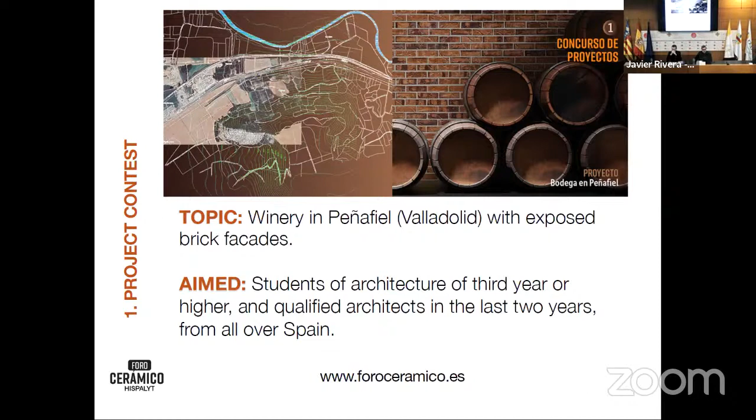The first one is the project contest that I was saying we are enrolled in. This year it's this winery in Peñafiel, in the interior of Spain. Although it's guided through a special course, in our case it's open for all the school. It's true that it's for third year or higher, but since it's team work, either you can look for teammates, and as you have one third or more on the team, you are able to participate too.

In any case, there are these two ways of working: through the local school, which is the one we are participating in, and then we compete against the other schools of architecture in Spain. So for the national award, there are these two phases of competition.

In our case, as I was saying, we are working in Architectural Project 5, so it's somehow mandatory for them with Sergio García Gascó. So if we don't win, it would be Sergio's fault for sure. But in any case, it's open for the rest of the school. We participate in this first phase, and then the winners and mentions will go to the second phase, the national one. So we need to win the national one for sure.

The inscription is free. That's something really important for us as a school. All the information is on the website, so you can check all the requirements there. You can also ask me for any data that you need. And the deadline in our case for the local one is the 25th of May.

As I was saying, in Architectural Project 5, they will develop the work during school time, so it's kind of part of the subject. And there is a small prize, but at least something, with two mentions, and then a bigger one if we are the real winners of the national one, which is the one I'm sure we are going to win this year for sure.

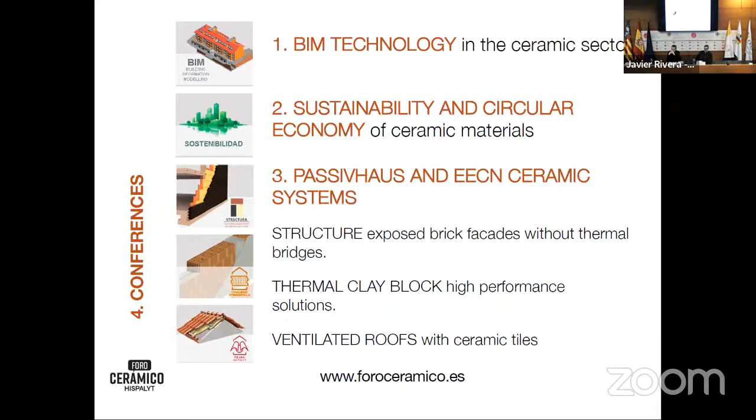And finally, going forward, there is also all this information about technical issues, which I think is really helpful, especially for working on your projects, where you can find a lot of information about this idea of working with brick in many ways, not just in a more traditional way. It's all this information that you can check and work with, especially for the competition — we are going to work with some of this material.

Also, if you ask for it in the survey, there is this factory visit, so we can actually go and visit how this material is built, which I think is also something interesting to see. And all this work is usually disseminated through the website, the ebook, so you can check other years' competitions if you are competing.

So all these things are recollected over there, which I also think could be interesting. As I was saying, it's very important: your architectural project teachers will provide you a survey so you can fill it in and think about which of those you are interested in, and we can continue promoting more activities for you.

Okay, so really quickly. As I was saying, we are really happy to have Carles here, which I think is a really young studio. It's one of the most outstanding architecture studios nowadays, winning a lot of competitions. I'm not going to mention all of them, lecturing all around the world, teaching.

He's also a teacher, but especially I would like to highlight his precise work in terms of understanding the site, which I think is really important for you to learn, because he has this careful analysis of where he's going to intervene.

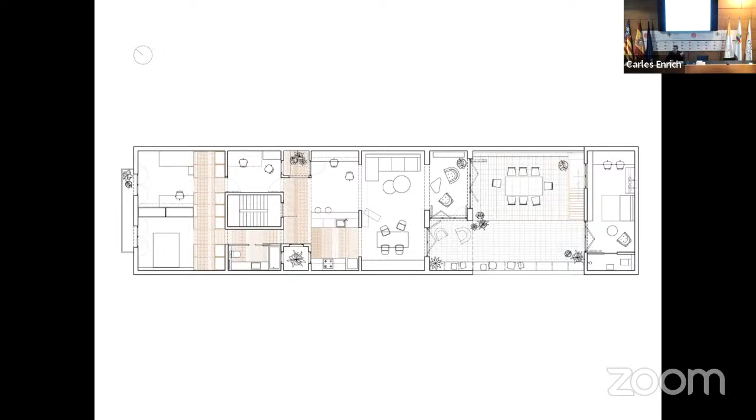So we started to do this kind of intervention, like opening spaces, of course with new structure in order to make this sequence of indeterminate spaces, which would make a connection between the interior and the exterior, the street, crossing the patio as a new space, and then introducing a new layer after transforming the pre-existing - a lightweight layer with wood or metal, understanding that this could be reversible in the future, and also trying to explain the difference between the pre-existing and the new elements, for storage or for using as a vegetal pergola.

And after all, this idea of trying to make a permeable sequence from all the spaces, understanding the street and the courtyard as part of the house. Understanding in the Mediterranean culture, also in Valencia, we can live in the outdoors like 8 or 9 months a year, even now. So I think we should be more worried about the summer heat, so we have to improve this kind of shadow and comfortable spaces in the exteriors.

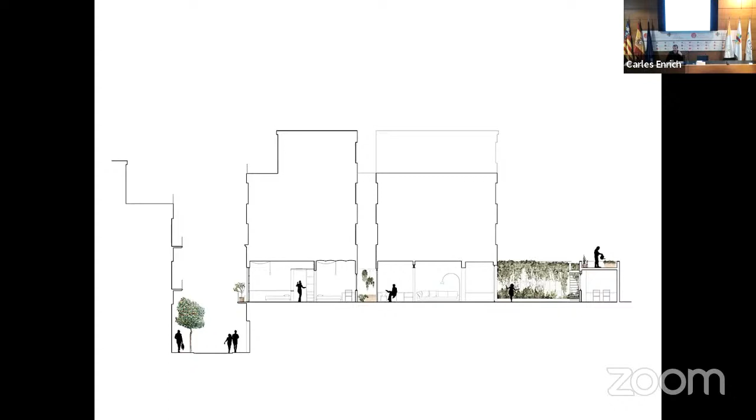In spring, autumn, and summer, we can open the house and live in the outdoors. It's a completely different idea from the passive house concept, which is a Northern Europe concept for an enclosed house. We think the house has to be passive in terms of installations, but the users have to be active in understanding how they want to live there.

With this approach, and with the commitment of the client to understand this kind of living, we understand the house could be only like a sequence of different spaces, connected and linked to the exterior, introducing vegetation as a new layer, as a biological material that can create shadows, and placing only the minimum things like the kitchen, in order to leave the space indeterminate so users can use and reuse it in the future as anything else. They can do whatever they want, and only these structures define the spaces without closing or enclosing the rooms.

So at the end, for us, the most important thing is this idea of transforming the exterior space, with these ropes and vegetable plants that give shadow in summer, but in winter let the light in, so it's a really comfortable place.

Another house, this one a single house between party walls in the north district of Barcelona, a very nice district close to Guinardó mountain.

We found this house, from the beginning of the 20th century, 1920, 1921, but it had been transformed and intervened by the former users, with all sorts of additions, and was really in a bad condition.

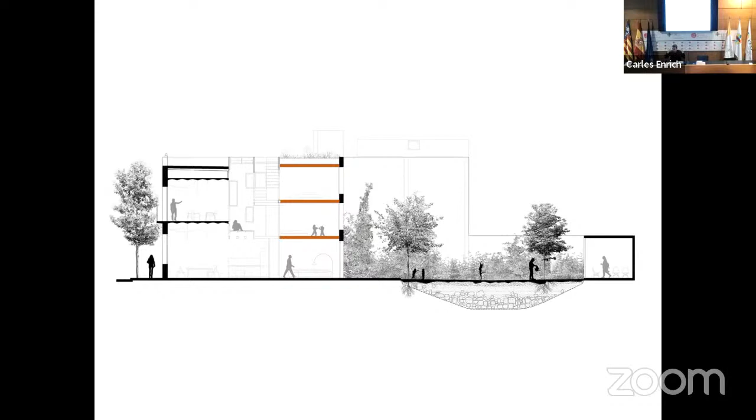At the middle of these two structures, the newer and the older, we placed all the facilities — the bathroom, the kitchen, and the staircase — in the middle of a patio with a skylight, so all the different rooms can have cross ventilation and a good relation with the exterior.

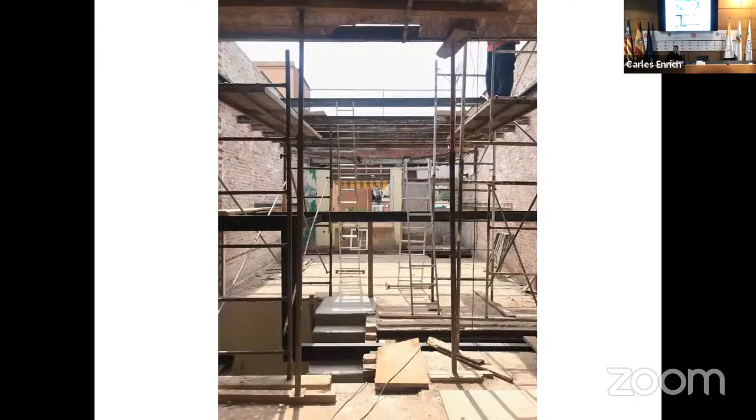This is some pictures of the work site progress. We made this metal structure to support the new slabs, the wooden slabs, left exposed like this as pavement and ceilings — a 20 centimeter CLT, already finished for this.

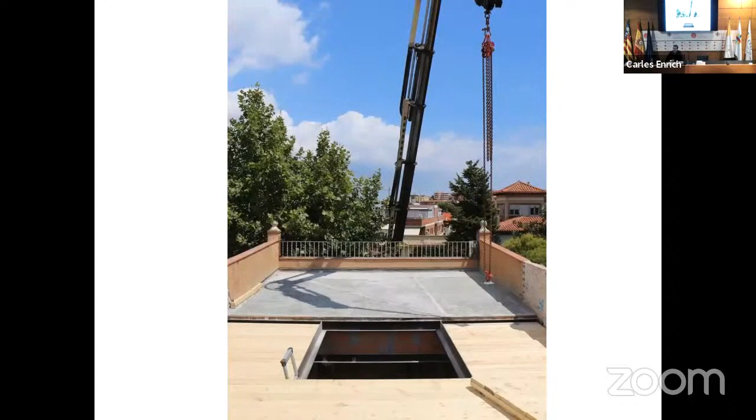This is an image of the central space that really helps improve the morphological conditions of the house, all the ventilation, cross ventilation, and natural lighting. This idea of understanding the sequence of time, the old, the new, and in the middle a void space that connects everything.

So the house at the end has two phases, the former phase and the new house, which has three levels, with this idea again of a permeable connection between the ground floor and the garden, understanding that the house itself is like a garden, an exterior space. Time is an important factor because it improves all these external conditions.

This layer of vegetation creates natural shadows, and in the center of the house we have this vertical connection between the different floors, and a greenhouse in the middle, which can be opened in summer to extend the surface and the connection and permeable conditions of the house.

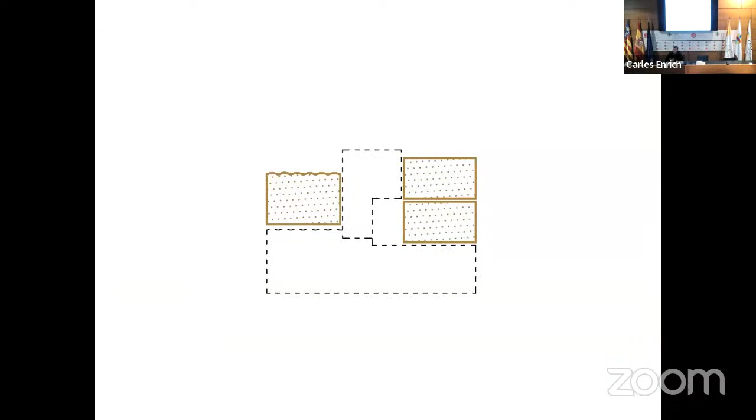In winter it can be closed, like a glass house, a winter garden. It can divide the house into different spaces, or it can open up into one single space. These are some images of this space.

Where it really works to improve the thermodynamical condition of the house. We are really concerned about this idea of moving air inside the buildings. At the end, we as architects build surfaces and work with materials, but the main factor of comfort is air temperature. So what we have to do is understand the values of materials.

Brick has inertia, wood doesn't have inertia. It allows a really fast temperature change, but it has good isolation conditions. And then this idea of having a vertical permeable patio improves the bioclimatic conditions of the house.

Also, introducing this idea of nature and greenery inside improves the quality of air and the quality of the space. So as I mentioned, this patio with the skylight captures the heat in summer and winter, and it's not just like a heat container, but in summer it works like a chimney, in order to achieve good ventilation.

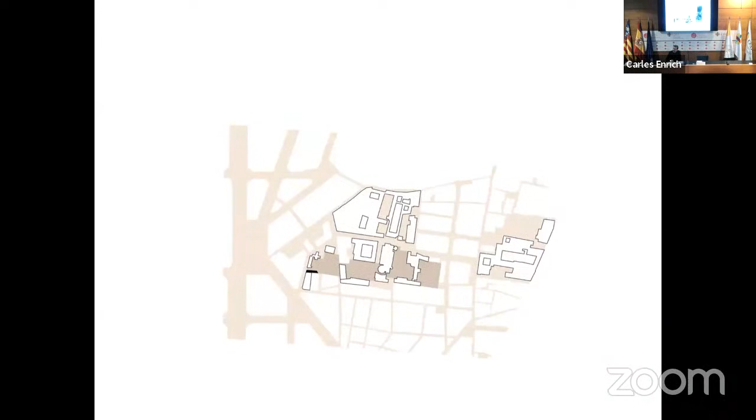We entered this competition to transform an existing housing building, which was unused, empty, and closed. The brief of the competition was to transform it into a public music school.

But the municipality of Barcelona wanted to demolish this building, because they have a problem with old buildings, since it's very expensive to transform them into something from the 21st century in terms of código técnico, regulations, etc. It's really expensive, and we also have problems with occupation.

These buildings in the center of Barcelona, in some areas, have a real problem with squatters. They get into the building and we don't have a law to remove them, and it's really a problem for municipalities. So they always try to demolish these buildings, which are often in bad condition.

But in this case, since it was in front of this old historical building by Josep Lluís Sert, the brief of the competition asked us to maintain only the main facade. We were really against this, since we didn't think that was a good idea in terms of reusing a building, only to maintain a facade and demolish the rest.

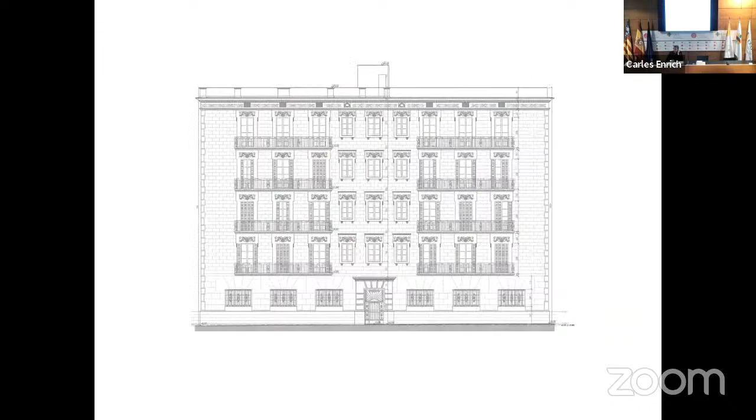We didn't really believe that, and instead of demolishing everything and maintaining just this facade as a framework, we proposed to maintain all three facades, in order to maintain the volume and the image of the street, and also to save parts of the structure to keep these three facades.

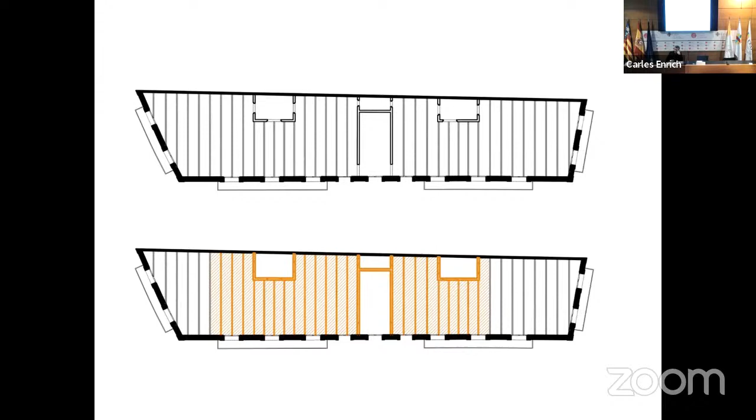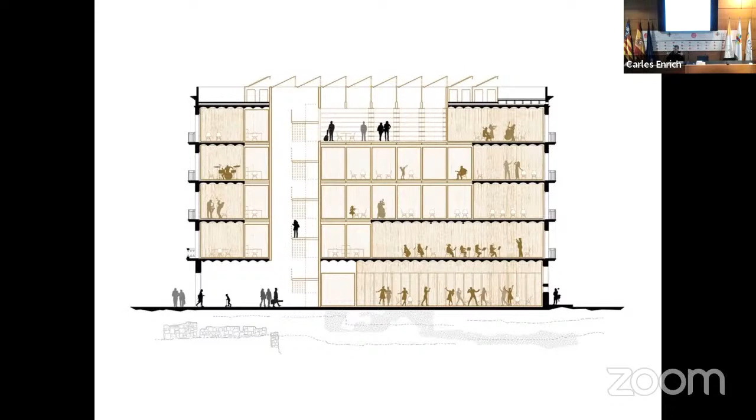And then we proposed this strategic demolition of the interior part of the building, in order to maintain the perimeter, the former structure, but introduce a great void space in the middle where we could add a light wooden structure that doesn't increase the weight of the building. This is a very good idea when working in historical centers like Barcelona's Raval, because we have a lot of archaeology and ruins underneath.

So with this idea of maintaining parts of the building and just intervening in the center, another idea that helped us win the competition was to replace all the rooms from the facade and put them on the back, between the party walls. This way we could have a corridor in the facade, like a street or public space inside the building, understood as a street connecting all the different music rooms.

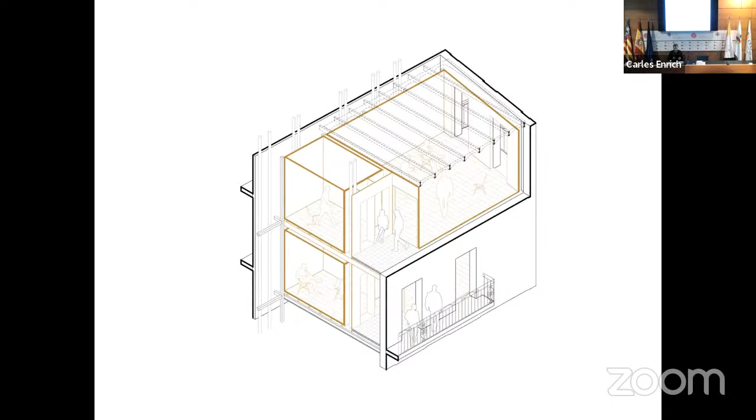And then this idea of box in a box, working with the great pre-existing box of ceramic, bricks and stones, the mineral box, and then introducing these light structures for the new uses that didn't touch the party walls, so we had some space for installations and facilities.

And then another idea was to understand the climate conditions of this place. Raval doesn't really have, the neighborhood has very narrow streets and has very low lighting, very low heating, not much sun heating, because the streets are really, really narrow. So in winter it's a problem. Now we wanted to achieve a good reduction of the heating.

And then we proposed this glass roof that in winter works like a thermodynamical idea of keeping the heat in this part of the roof, and in summer we shade all the glass roof, and it works like a thermodynamic conductor to help the heat go out of the building.

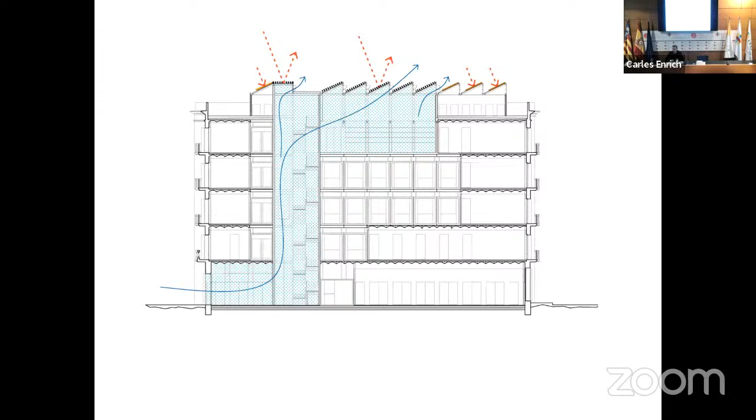So with this kind of interventions, with this kind of ideas, we try to reduce the need of installation in public buildings, and also try to improve the bioclimatical spaces inside the buildings, which we think is really important, in order to reduce the need of machines inside the buildings.

So now the building, we just started this first one, which is the intervention, the interior demolition of some parts of the building. But we are really happy because with this competition that we won, we could save, or we think we could save the original building. So that means the history of the building, that means the material, reducing the need of new resources, and of course obtaining these kinds of vertical spaces, which were very powerful.

Okay, with the same idea, we improved this idea in another competition. Actually, this was, I think, the first competition we won in Barcelona, 6 years ago or 5 years ago. But now we had the chance to finish the first one after 6 years. So as you imagine, we are a young studio, but now we are finishing the first competitions that we won 5 or 6 years ago. So in terms of architecture, you have to be patient, and you have to take your time.

This is Vallcarca. This is a neighborhood in the Gracia district, in the north of Gracia. This is a very interesting neighborhood. It's actually in the valley of Tres Turons, the three hills, as you know, Parc Güell and Turó de la Rovira, etc. So this was a former agriculture area. This was a former second house area, even for Barcelona, because this was not in the center of Barcelona. This was like in the outskirts. So there was plenty of these small houses with gardens implemented in this topography.

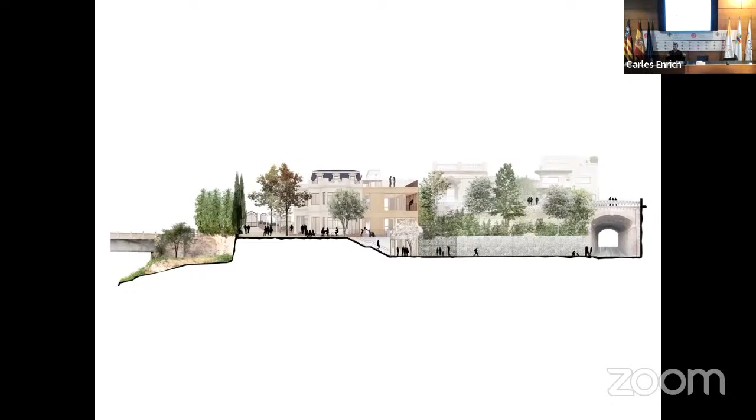So we could improve a connection that was far away from our competition site, but we took a risk on that, and then we proposed in the competition that all these gardens would be, in fact, a connector between the different streets. So it would help.

It will improve the accessibility of Vallcarca's inhabitants. So at the end, for us, the competition was not only about the refurbishment and renovation of the building, which was also an extension because it's a really small building, but about improving this idea of urban connectivity. We won the competition with this idea.

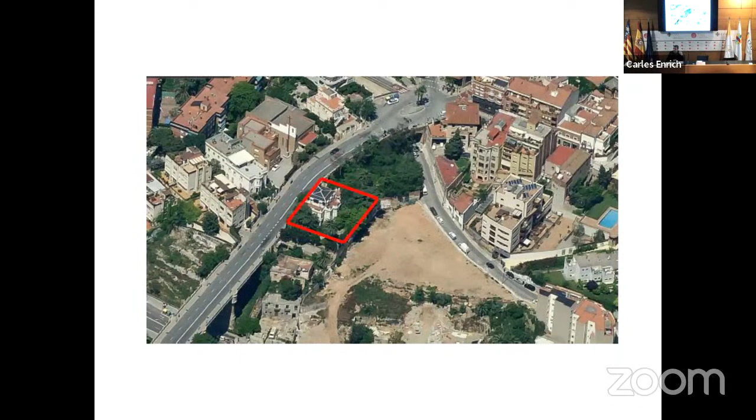We were quite risky because we were outside the scope of the competition, but I think the jury appreciated that we were the only ones who saw this opportunity, and they gave us the first prize. So we developed this project.

This project was about understanding, like the other projects, the value of the pre-existing house, with tough, mineral materials like bricks and stones. So we thought we could replace the permanent uses in the former house with a light wooden structure, in order to have this contrast between the new and the old.

This light structure was an indeterminate space, for different uses, multi-purpose uses, just a polyvalent surface area. Of course, we tried to be very precise in order to do this kind of overlaying system between the different structures.

We finished the project, and in March 2020, three years ago, we were about to start construction. We actually had the first meeting with the municipality to start the construction process. But in March 2020, I don't know if you remember, there was a world pandemic.

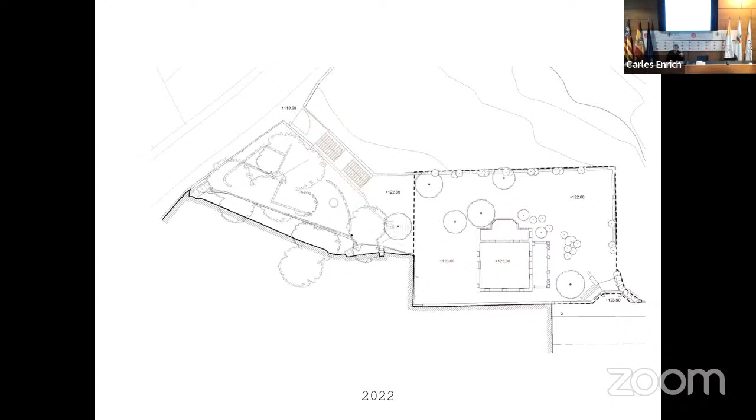And then, of course, we had the commission of intervening in the house, in order not to leave it as a void space with rooms in very bad condition. So we decided to demolish the interior, but leave it as an open space linked to the gardens.

So at the end, we're going to make this whole project into a garden, a public space, and the house itself would just be a roof, a shelter for this exterior space.

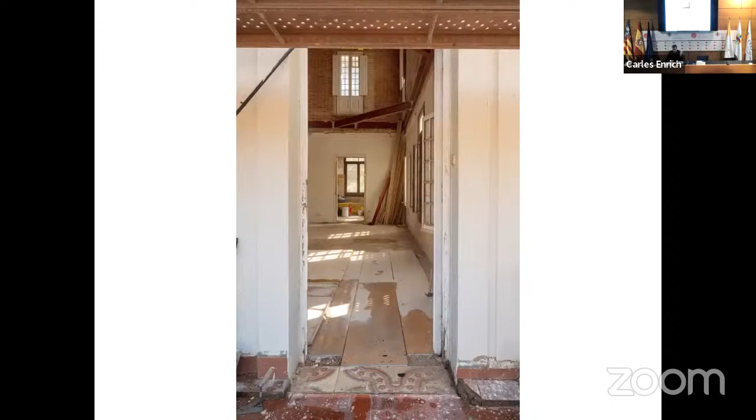So at the end, they bought this idea. They said, okay, if you can do it with this price, do it. Let's do it. And then we started this deconstruction process, which was really interesting.

We had to reinforce the roof. We implemented all these walls with new bricks on the surface in order to improve the vertical structure, which was in very bad condition.

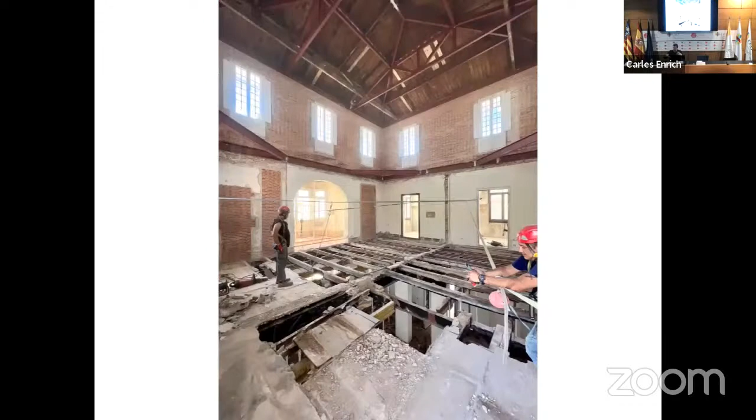We introduced a new layer of bricks into these structures to maintain the space. And we did this construction operation to transform a house with small rooms, non-ventilated rooms, and interior staircases, into something like a temple.

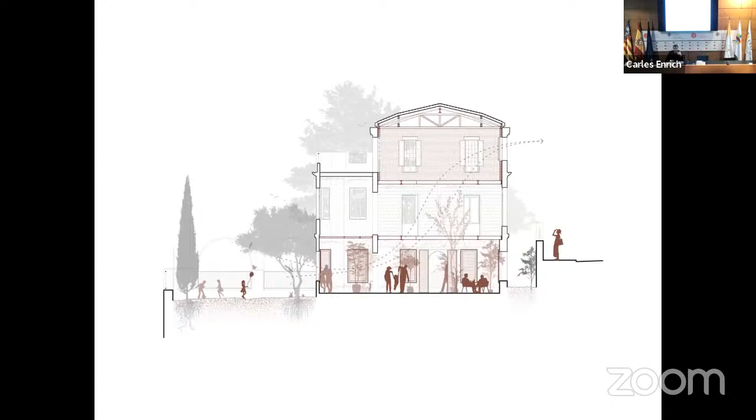A temple, of course, an empty space, but the idea is that it can be used for anything, as a public infrastructure linked to the gardens that can be used for cultural events, expositions, concerts, poetry, something else. Now we have finished this moment.

We hope this is like a temporary phase, but we hope this idea of temporality will be long term, because we really like this project. At this moment, we replaced all these rooms at the entrance, etc.

We have this situation at this moment, and now the municipality of Barcelona is really understanding the potential of this space, and is starting to think it could be some kind of satellite museum for another cultural event in Barcelona, or a temporary exposition. So in the end, we think this is really a social place.

This is really a new building, maybe without a conventional facade, without installations, but it's a building with a very low budget, and it's a building for the 21st century. We really think the city needs this kind of ambiguous situations, a building that could work as a climate refuge but also as a place for temporary events. We are now working on the gardens, so soon it will open to the public, and hopefully it will be used for the city as a really new space.

Okay, we start with the second group of projects. These projects, I think, are almost all new plans. This is another competition that we won two years ago.

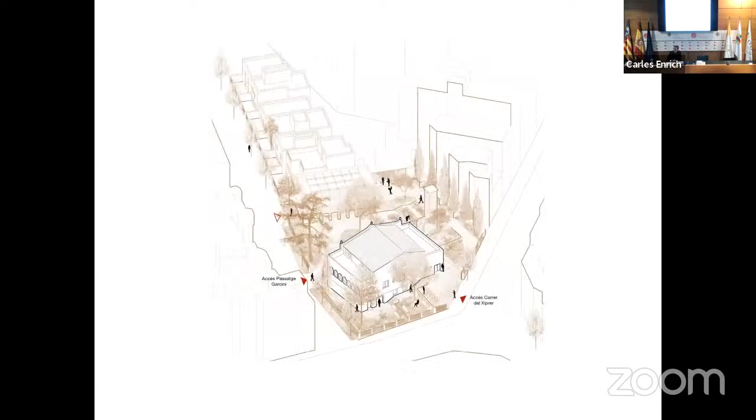But the competition wasn't only about the renovation of this house, it was about adding a new layer. Since this house was very small, and the proposed use for the competition was an elderly people center, the competition asked for the possibility of introducing a new space for different uses for the neighborhood, like a theater or small talks, etc.

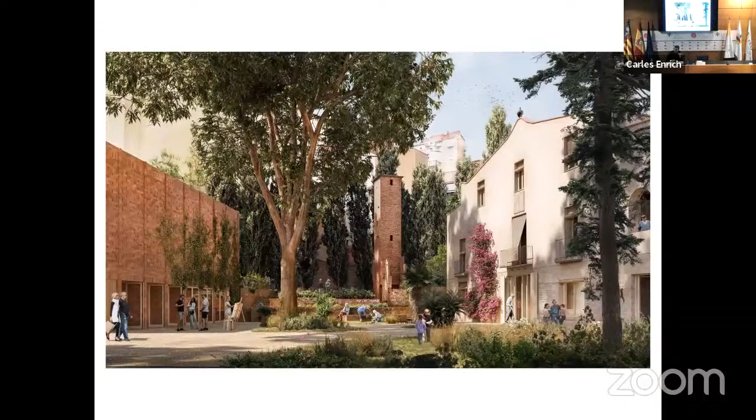Like an indeterminate space. We proposed to build it here at the party wall, understanding the history of this place, as it was built at different moments and different situations, like this water tower. So we placed this—it was like an old storage place with brick walls—and then we really improved the connection with the exterior.

We worked with water, introducing it as a new element in these gardens, in order to have biodiversity of animals and plants, and also to improve the bioclimatic conditions of the farmhouse. We again understood this new element as an opportunity to have these indeterminate spaces, understood as a continuation of the exterior space, as if it were only a porch.

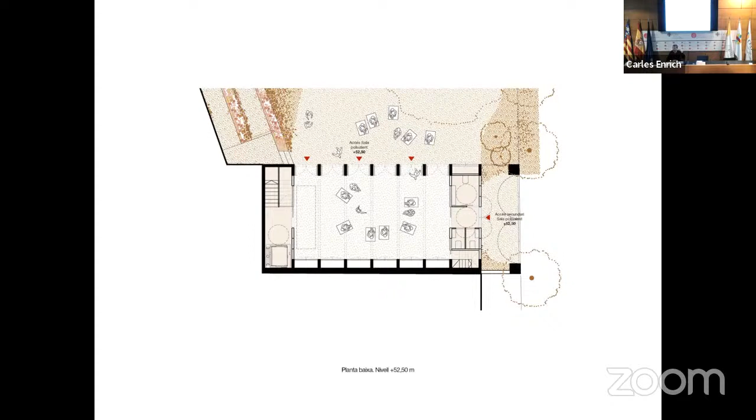So now we are developing this project, and this allows the possibility to have different phases—we could start by doing this, and then maybe in the future do the farmhouse. With this idea of dividing a big program: some years ago in Barcelona we were more used to building big buildings with huge surfaces. Now the idea is building small buildings, or rebuilding and reusing small buildings, constructing small places with a domestic scale, in order to be faster in construction.

Okay, another project. Now we're going to see a sequence of different competitions we are actually working on at this moment, all of them with this idea of introducing a new structure, a new element, in a place which improves it and looks toward the future—it thinks it can be reused for something else.

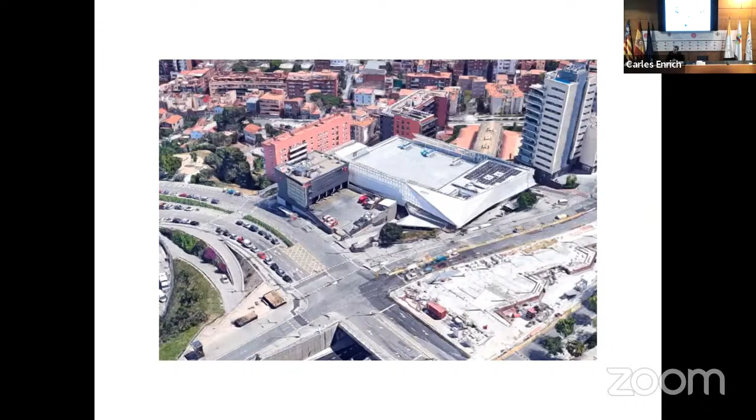In this case, the competition was about adding a fireman practice tower at this fireman place in Barcelona. In Catalonia we have some towers where firemen go to practice, where they climb and jump, reproducing the toughest situations they'll find in buildings. The competition was about creating this new tower, and the brief was to be aware of and understand the landscape, trying to integrate it into the context.

Since it's a very strategic place, near the rondas, this tower will be seen from a lot of points. Our first approach was understanding the site, but we thought our context was not only the fireman place, but also the dwellings on the other side of the rondas, and all this informal construction of Carmel's neighborhood, which is really cheap construction, informal bricks, party walls, etc.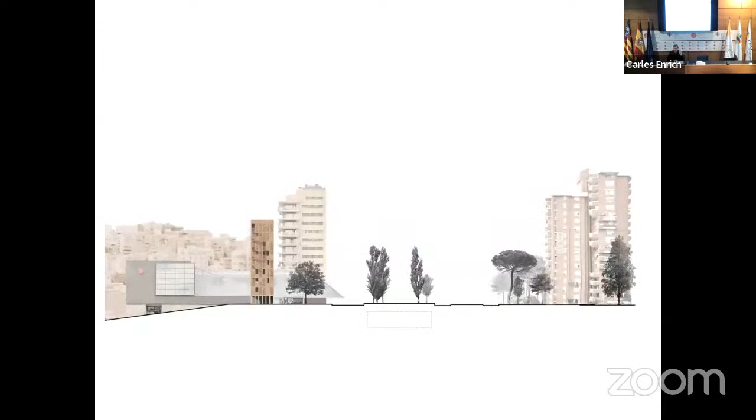We thought this was our context, so we proposed a tower made of concrete and bricks, as a materiality connection between two parts of the city, in order to propose a building without any kind of maintenance. The brief of the competition didn't want any glass, wood, or metal, because firemen use it to wet it, even to put fire in it. So it was really tricky to think about which materials could be used for that purpose.

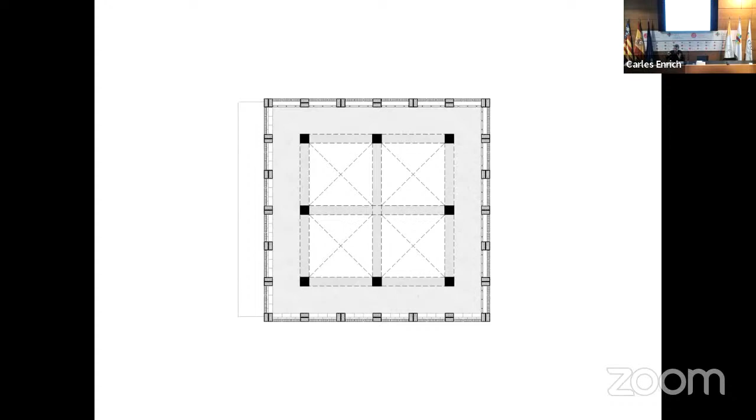The structure is really simple, an elemental structure. It has 8 columns in the middle, and the plan is approximately 8 by 8 meters. We have these 8 columns in the middle, and then a perimeter staircase which goes up to the 8th floor. In the middle we have different situations in terms of the program they needed, different staircases, double spaces, etc.

In the middle of the space we have some traps and a lot of different situations. In the exterior we have another corridor, not vertical, so that the firemen could practice in parallel, in the exterior and in the center. We also thought this building maybe in the future could be used for something else.

You could cover all these holes, and it could become an interior space with a perimeter gallery, which would improve the climatic conditions. The section is like an interior topography, really interesting in terms of different spaces.

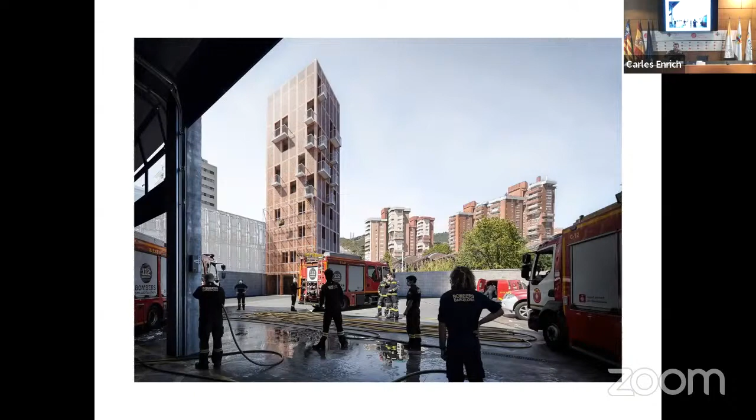This is some images of the competition. We had different balconies, windows, etc., to simulate the situations of different buildings, which was on the brief of the competition.

In the interior we have very raw materials without any kind of finish, just the bricks. We place the bricks upside down, with the holes exposed, in order to let the air and light go through, but also to be more permeable and not have a huge impact in terms of wind, since it's a very tall building, about 24 meters. So it's important to think about this kind of air lightness.

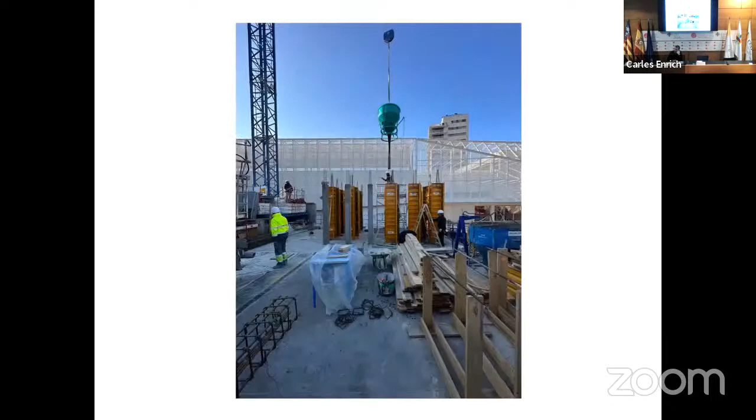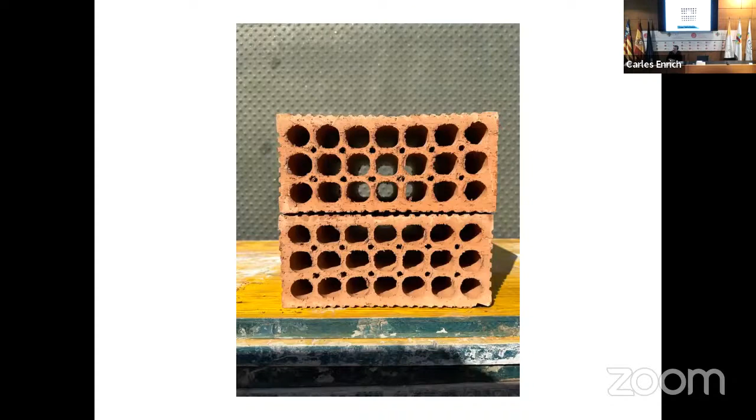Now we have finished the foundations and we are going up, with very thin columns of 25 centimeters, concrete, and I think in 3 or 4 months we will see this tower. These are some tests we are going to make for the facade.

The last competition, or the other project of this group, also works with this idea of new enclosures that introduce a new grid that could be used for dwellings but in the future could be used for something else — a project in Mallorca, in Palma. It's in a really extreme condition, because it's really close to the airport and really close to this highway.

The acoustic condition was really hard to achieve. Actually the plot itself was really strange and narrow, starting from 10 meters and finishing at 0 meters — like a triangle, but really narrow. There was also a pre-existence that we took advantage of and wanted to maintain, like this rock — Marès rock, a Mallorca, Balearic stone, which was on that site and explained the history of the place: it was una cantera.

A quarry. So we wanted to maintain the essence of this place, and we understood it as an introduction of a structure in order to achieve the program of housing, but to maintain that idea. And we had the references.

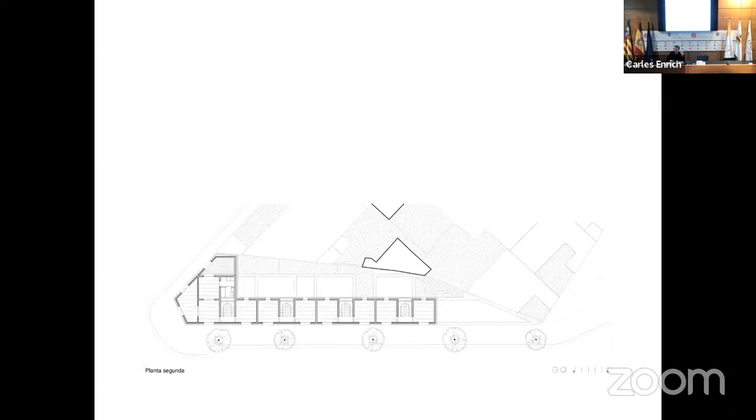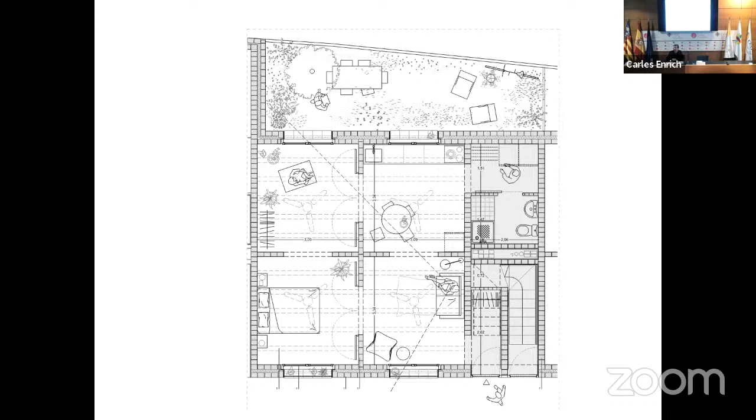We have different typologies, but this is the common one. In the ground floor we have 4 spaces. These are small buildings, only about 60 square meters or even less sometimes. We have 4 equal spaces. We place the kitchen, but the other spaces can be used or changed as the users decide. These are some images of the interiors.

We have this idea of permeability, of living in the patio and having just a roof, understanding the place as a porch. Since we go up, we have different situations of intermediate spaces, like these terraces.

Now we are already under construction. This brick allows us to—we didn't want to cut any brick. This is something that for us is like a statement. We use this material even though it's cheap, but we really put it in value, and we drew everything so we don't want to cut any brick.

So at the end this will be exposed. We are thinking of not even painting it, because since you have a lot of light coming from both sides, this material itself is nice and warm. So at the end we think maybe we won't paint it.

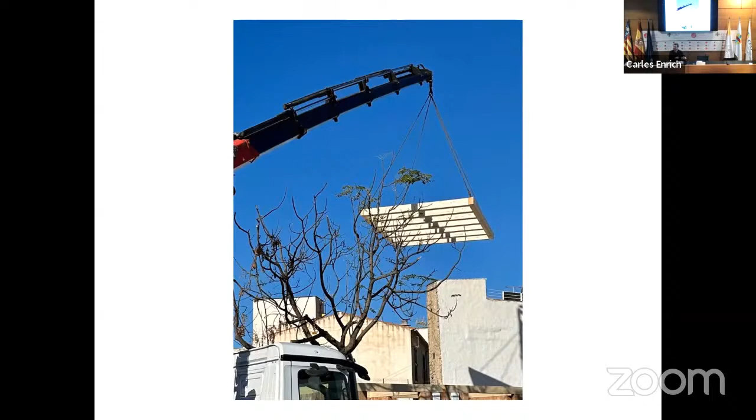We will leave it like this, combining this idea of low technology, of just placing simple brick walls, with the idea of faster technology in order to achieve good timing for the slabs, for the horizontal structure. Since all the places are equal, we could prefabricate these light structures, and they were located inside in maybe only one week.

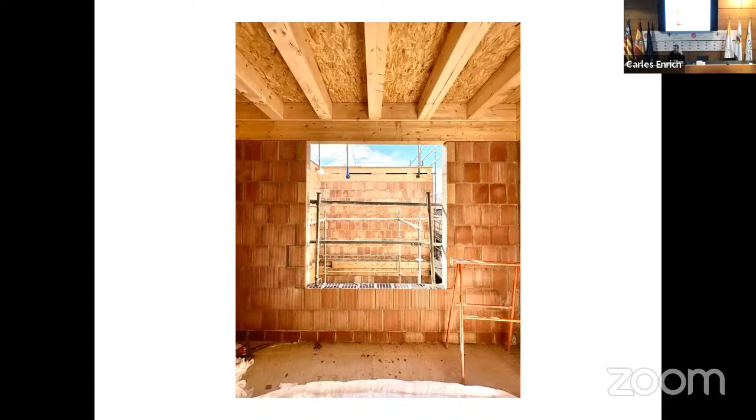Now we are in this moment—this is the ground floor, again this idea of sequences of spaces, connection with the exterior, lots of light, lots of air. Air is really important for us in terms of Mediterranean way of life, and also sunlight, trying to achieve good lighting with these halls and empty spaces in the first and second floor.

At the end we maintained this rock as a pre-existence, so one of the patios will have this surprise when they arrive there. I think it's nice because it's like a biological or geological resource. It's interesting—even if the space is quite narrow, it's strange, but it's kind of unique.

At the end, the promoter decided, or the IBAVI—this is IBAVI—this project was published in El Croquis, alongside a lot of great and amazing projects by our friends.

Now we are facing the third part of the lecture, the last part. I think I already explained our whole ideas or statement with the other projects, and now you will see the same ideas, the same approach, but with very small—I think the smallest interventions we have done—very local, very precise, and all of them working in historical and archaeological sites.

The first project of this group is Jorba, or the castle of Jorba. Jorba is a very small municipality in the west of Catalonia, west of Barcelona, near Igualada. Castle of Jorba was important because of its strategical position.

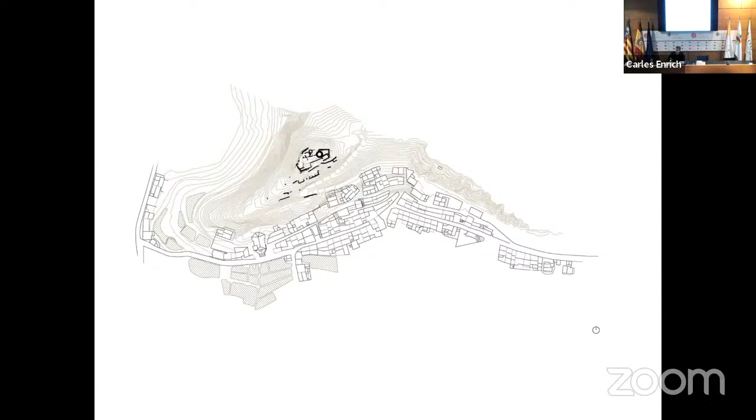The town of Jorba is only 2 streets, really small, maybe 200 or 300 inhabitants. In 2015, we were called to see this castle. We saw this mountain with 4 rocks on the top, but we fell in love with this castle, with this mountain, because we really thought, okay, this is reality.

This is the pass of time, the sedimentation of earth, of moments, vegetation. We wanted to keep it like this. But we had a commission to do a master plan in order to think of different stages of intervention to recover the Castle of Jorba. We are against the idea of recovering a shape, a form.

We don't think that architecture, history, or heritage has to be reconstructed. It has to be reinterpreted. This is quite interesting for us, because at the end, we didn't want to reconstruct the castle. We wanted to reconstruct the experience of going to the castle.

The experience of going to this place was the height, the landscape, the connection with the territory. So in the master plan, we wanted to achieve these different levels, since the Castle of Jorba itself is a collection of different moments, from the 11th century until the 18th century. We wanted to be on those historical spaces, and we proposed a passage, a route through history.

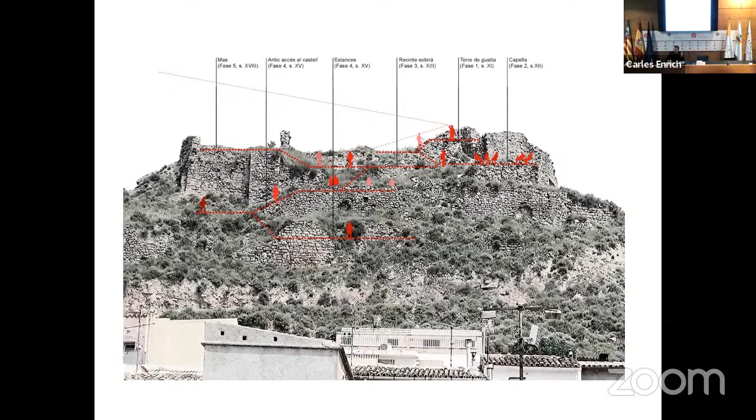So in 2017, we had the opportunity to start phase one of recovering the castle. For this first phase, we had a great budget of 30,000 euros. That was not our salary, no.

It was for the work, so imagine our salary. I don't know if you're familiar with that, but it's maybe 10 or 12 percent sometimes. So we did nothing, just paid for the car, the gasoline, to go to the site work.

Since this was only a very short and economical intervention in the castle, we decided to work with the archaeologist, not after the archaeologist, which is the usual way. Usually you wait until the archaeologist finishes the excavation, then you work. We decided to work with the archaeologist and with the material coming from the archaeologist's work, which was the earth.

Since the archaeologists were just replacing earth and excavating in order to find more structures, we took all this material and placed it into the north part, in order to improve this topography and improve the accessibility to the castle. That was our first step—going up to the top, to the highest point, to be rooted to the landscape, to recover this ancient view that in the 10th century someone decided was the great place to place a castle.

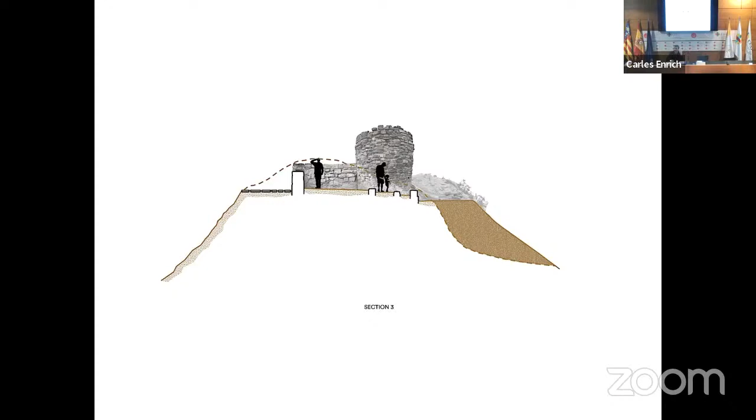So we moved earth, and then we reached the top part, so we could recover the view of the landscape, the original landscape. And for us, that was the castle.

That was the experience of the castle, just getting to the top, facilitating the people getting to the top. We introduced this staircase, just a wooden staircase.

We had a lot of problems of accessibility, since we could only get into the castle by car, not by big trucks. So we had to think about cutting materials to bring them in by car. We decided to cut the 240 centimeter frames into 120 and then 60 centimeters, so they could be easily placed there by two people.

And then just a rope that was like the border, the edge of our visit. No, it's not a handrail, of course, but in the mountains you don't need a handrail. That's what we said to the municipality. We don't need to put handrails here, we don't have money, we don't want to put handrails in a mountain. It's only like a limit, to understand which is the accessible area.

And we left all these rocks that we found in the excavation here, so as not to waste time bringing them down or to another place and then maybe two years later bringing them back. We left them here, okay.

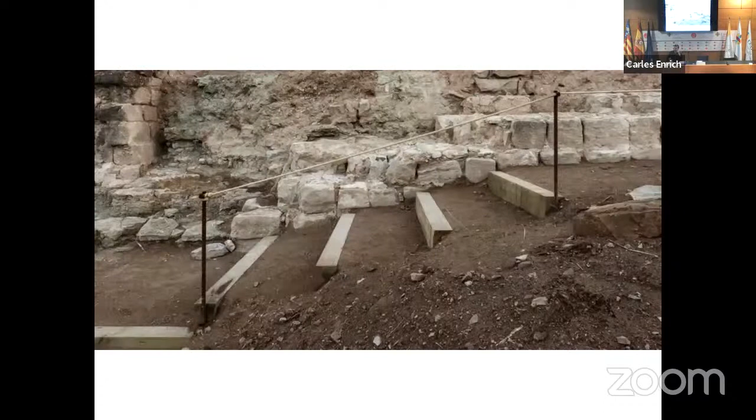And we improved all these low-tech details in order to explain that it could be achieved with a very low budget. And that's the project: the earth movement, the introduction of this staircase, and just the rope.

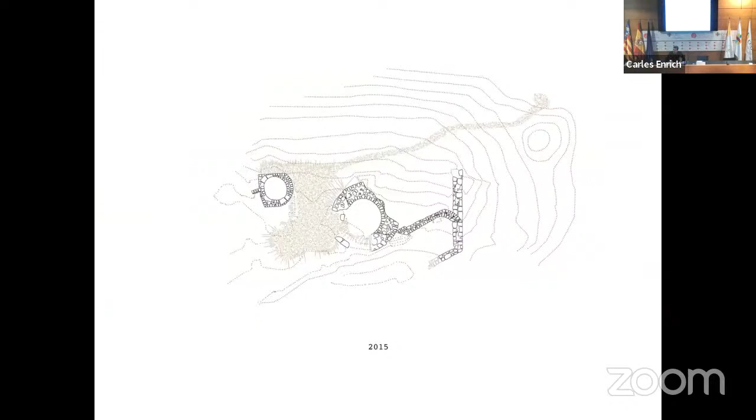Actually, I think this is one of my favorite projects that we have done in these last 10 years, because this first phase is almost invisible. It maintains the sense or the idea of a mountain with 4 rocks. Now it's a mountain with 4 rocks and a staircase. But it maintains the main idea, and now it allows the connection, it allows the access and a kind of traveling. Since we placed this staircase in different situations, we have 5 different parts.

The second one, the third one, then we turn around 90 degrees. We can touch the rocks. For us, it's important to touch the heritage. Heritage is not only something to see, to look at, to take pictures of. It's something you have to use, to live, to touch.

So in this case, of course, we wanted to be very close to the castle of Jorba. And then we go up, and we reach the high part. That was in 2017. In 2021, four years later, we had the opportunity to continue the project. We had more budget, not a great budget, but some more, and we could finish this first idea of the route.

While we were again working with archaeologists and doing excavation, we had a surprise, because on these projects we couldn't go in with fixed plans. We had to drop all the plans at the beginning of the work, because every day was a surprise. We had to improvise, react every day, maintaining the budget, because this is public budget coming from European funds. Maintaining the budget, we had to change the project constantly. So it was really tricky for us, and we were really happy with the final result.

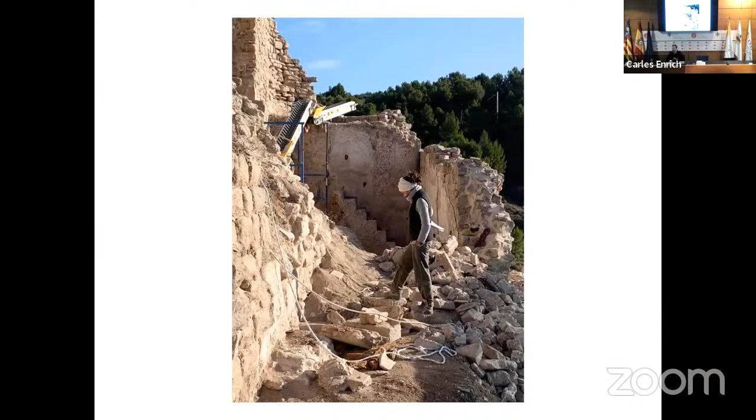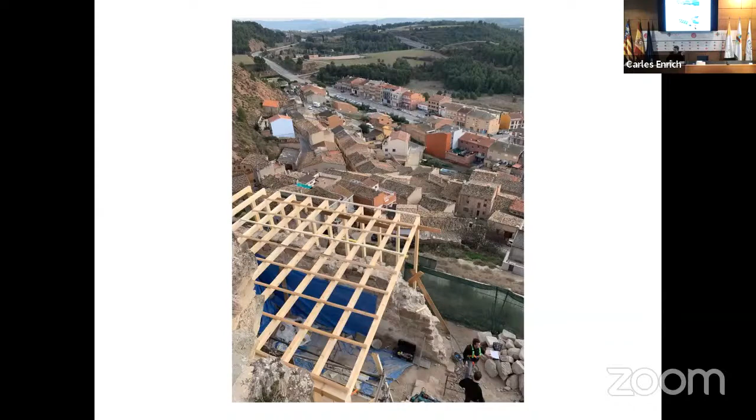So we had to take out some parts of the project to include this new roof, within the same budget. We reused material, rocks, etc., for this container wall, and then we introduced this new layer, which is a wooden structure. It's reversible, so maybe in the future it can be replaced. We don't care, now it works. It helps to keep the place, and it also highlights some interesting levels of the site.

And it's the end of this route that comes from the bottom of the hill until the top, and then it finally reaches this point. It's like a landmark. It's interesting because it can be seen from the exterior.

It can be seen from the village, so you understand the height and the site of the castle. It's okay, it's a superposition, an overlay of a new layer, and it integrates with the existing structure.

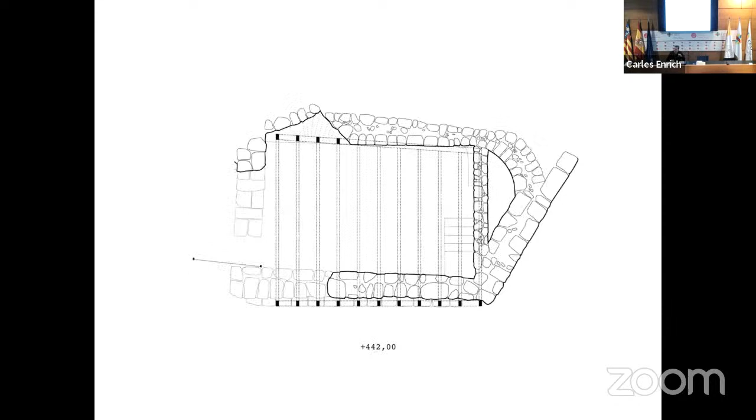And itself, it's like a new space, which we think actually functions as a visitor center space, just to start the visit. It's interesting how the introduction of a very small element really transforms the existing space, and puts value on the existing space.

But for us, the most important part of this project was this new topography, and this viewpoint, from this side, to understand, to finally reach and touch and step over the history, over the ancient level.

Another project that was made, I think, around the same time, between 2015 and 2019. Actually, it's another intervention in an archaeology site. In this case, it was a former defense tower from the 14th century, the Tower of Merola. It's really fantastic.

We did the visit in 2015, and we saw only this situation, which was worrying them because it was about to fall down. This was in this condition because of the earthquakes of the last centuries. And in 2016, there was a great storm, a lot of wind, and the top floor fell down.

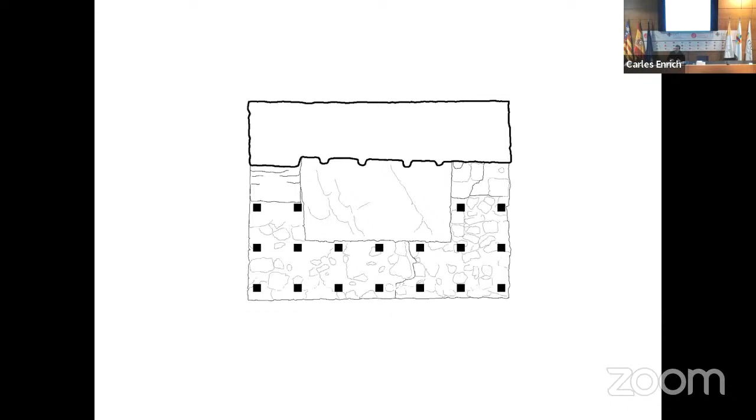As you see, we have a lot of experience in small buildings, small places. So again, our fees were really low, as was the budget of the project, but we took a lot of effort in this one, and we were really happy to finish it, to have the opportunity to work on it.

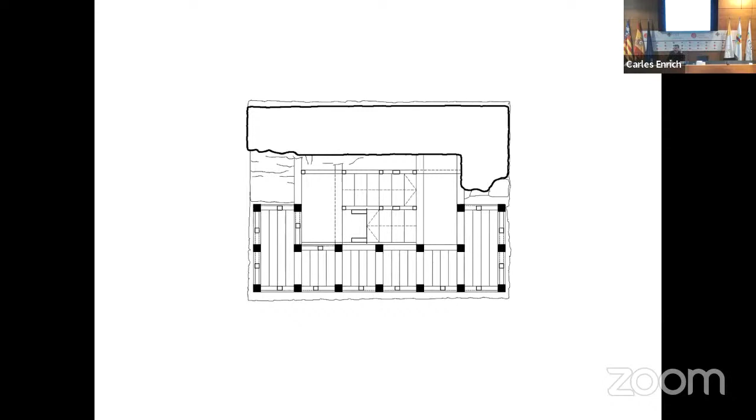We proposed a structure that combines the prefabricated logic of wood, really precise, with this idea of understanding the preexistence. In the middle we placed a staircase set like a maintenance staircase, but at the end it's just a path to connect the different levels and to connect with the top part of the tower.

We wanted two things: to maintain the original image of the tower, understanding our idea as a sequence of layers. This is the same idea as the house we saw at the beginning, or the social housing in Vallcarca. Understanding the material itself, the preexistent, introducing a new wooden structure, and in the middle there's this connection space that connects both structures.

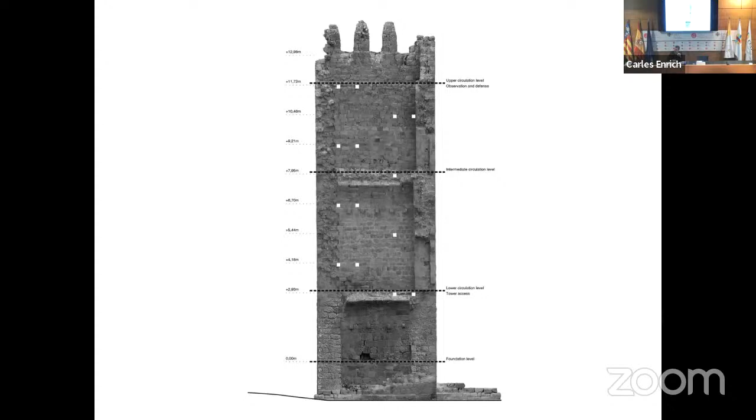We tried to be very precise. We had to work with this idea of overlaying and trying to find the best ways to connect both structures with these 14 points.

For us, it was also very important to transform the ground floor in order to improve accessibility. This is, I think, the strongest idea, trying to reach the top in order to link and recover the view of the landscape, but from the ground floor, trying to recognize the original tower. We didn't want a new structure that covered the tower, but one that was permeable, so as to maintain the original view of this place.

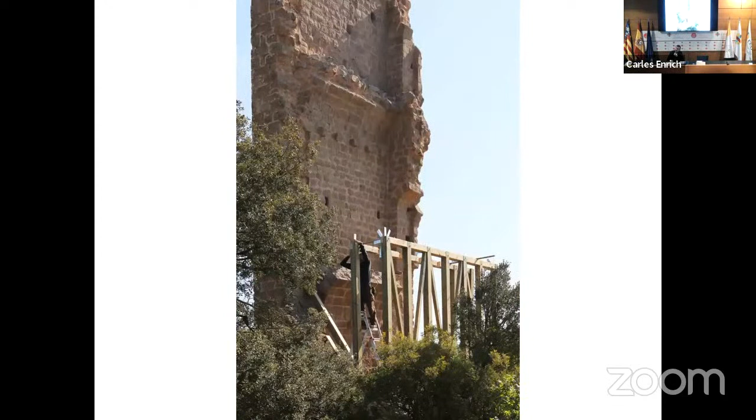Now these are some pictures of the site. With the new structure, we could also recognize the volume of the tower, not the shape, of course, but the volume is the same. And then we drew everything, all the details.

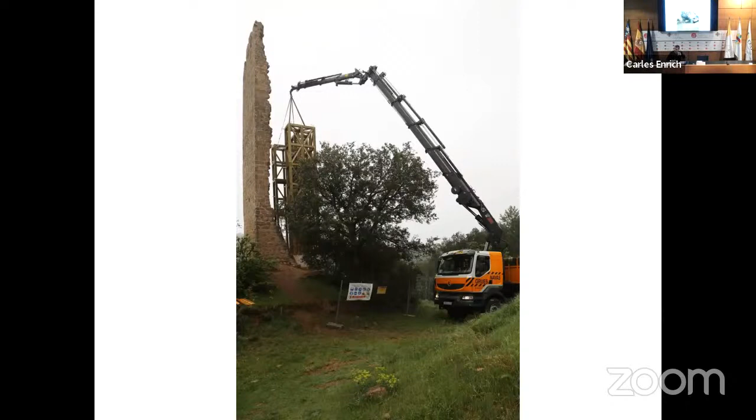This was again done with a local constructor. We were lucky because 2 kilometers from here we have one of the most important wood builders in Catalonia, Fusta, which was really close, so we could go to their atelier and precise the details. Then they came here and we built this really fast, since it was prefabricated, just replacing these pieces and connecting them with the original tower.

This stabilizes the tower and creates a new space in the interior. It creates a new atmosphere, a new idea of connection. At the end, when we finish, it's interesting to understand the two structures and this space in between, which relates to the time, to the past and the future.

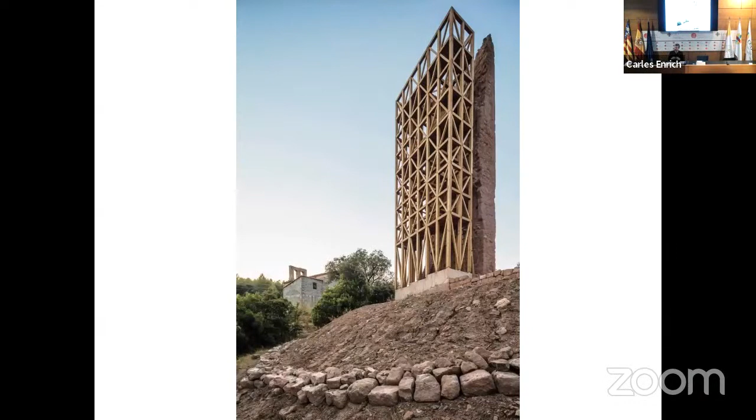And of course you're still able to see through, to understand the different levels, and to see through the new structure and see the rocks and stones. We left all the rocks we found on the construction site, on the excavation, on site to explain all the original material, as another layer that was interesting for us.

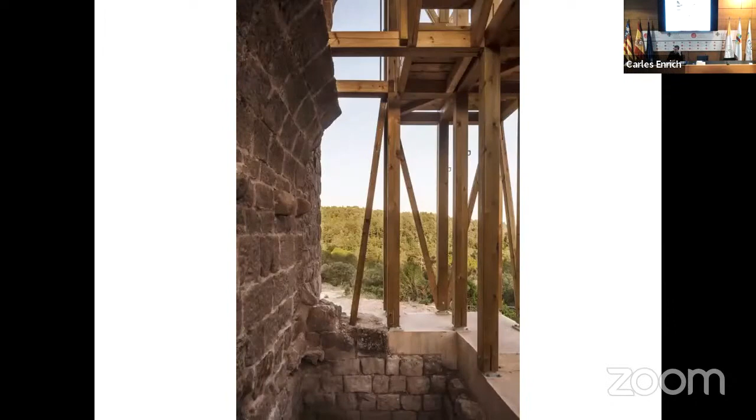Now we're going to have a tour going up, okay? Another interesting thing is that since we transformed the former stone wall into a column structure, we can be inside the empty space that occupies the original wall. So now it's like a negative space, where it was first a solid space, now it's an empty space. And we are inside the wall, we understand the size, the dimension of the wall. It's a really strong feeling, a strong experience.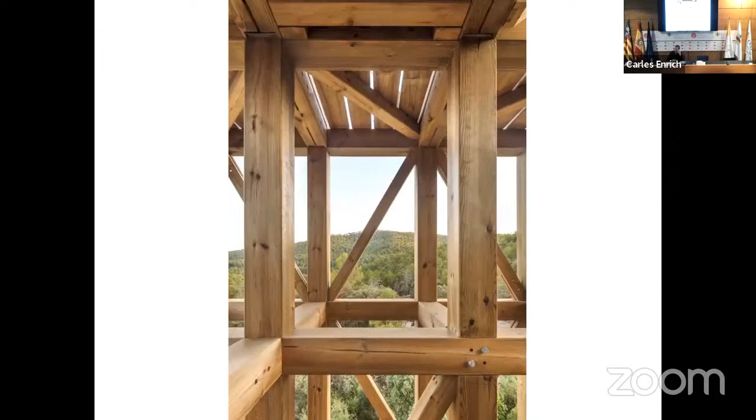This structure helps us frame the heritage and also the landscape. It's important because this tower was for defense, so they had small windows to shoot at the enemies. With this idea, it's a new version of that.

The staircase connects with the original levels, and when we go up we can touch the tower. So again, it's a very physical and approximate experience of heritage. It's not a heritage to be seen, it's a heritage to be touched, to be lived.

Finally we reached the top part, and we recovered this view. It was our goal to achieve this and to recover this point of view and this height, this historical height.

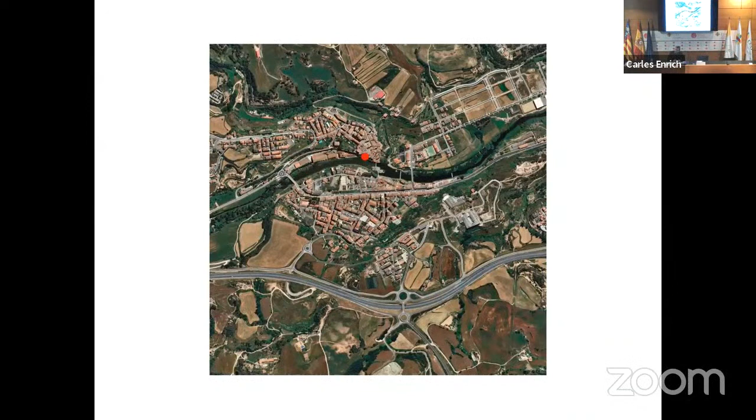Okay, the last project for today is actually a history of 3 projects in one, or a sequence of projects. Gironella is a small municipality, 1 hour, 1 hour and 10 minutes from Barcelona in the north. It's divided by the Llobregat River, and the plan of the town explains the pass of time, the history.

We have the old center, the old village, which is over a hill about 20 meters above the river. We have some industrial area near the river, and on the other side we have the modern constructions, the modern housing, etc.

In 2013, when we started this project, we had the commission to implement a small master plan, or first the initial ideas of a study.

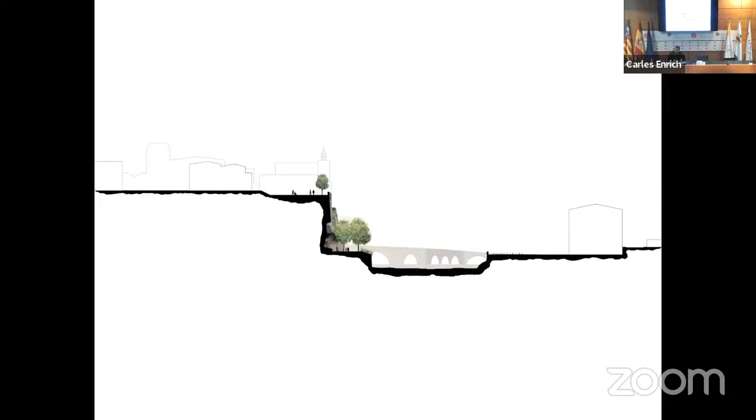They were worried because people, the old town was depopulated since people were living in the new town, and the old town at the top of this hill was losing its life, and of course it was really degraded.

This is a section of the proposal. The mayor wanted to implement an elevator, a lift that connected the historical center to improve the accessibility of this place, because all the streets are really narrow with staircases, and the old people need even cars to go up.

It was a really tricky and hard commission because this is cataloged as heritage. We thought we could really mess up here, because putting a new structure like an elevator is really hard. So we had a look around.

We really think that heritage is not only the tower. Heritage is also the history, the industries, but also the informal structure, the informal houses is heritage. It's important for us, and really important, the natural heritage of the riverside.

In the riverside we saw this old storage space, an illegal storage space. As you see, no one used this passage. This was an old passage, called Metres Passage.

This was used to connect the old town with the industries in the beginning of the 20th century. But nowadays it was unused, like a residual place.

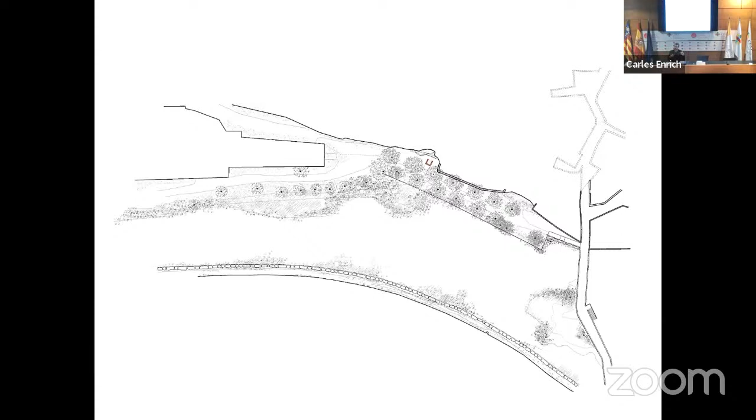With this movement, this place would become dynamic and would be recovered. This new place we proposed was at the center of the old plaza, so we thought it was a good situation to establish this dialogue between the old tower and the industries.

But for us, what was really important in this project was not about connecting the old center with the modern part. The strategic goal of the project was to bring people to the river — to permit this connection between the river and the old part.

With this section we have two parts. The first 8 meters is glass covered, because we wanted a more visible relation with the wall, and when you go up and down you have shadow from the trees so you don't get heating. For maintenance, we didn't want glass on the whole facade, because it would get hot in summer and dirty.

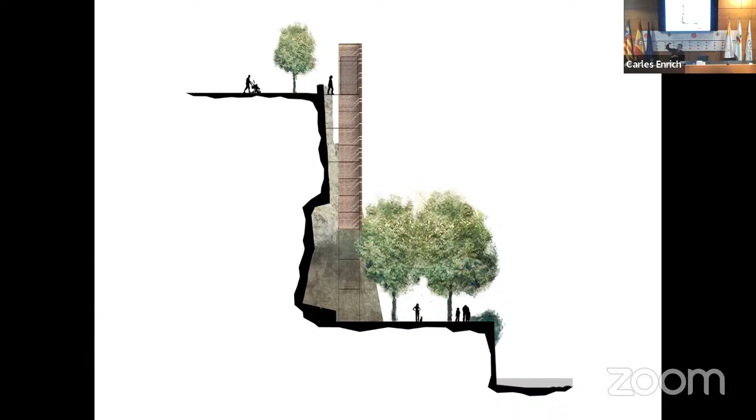So we put glass only on the first 8 meters, and from there to the top we placed a brick lattice. We turned the bricks, leaving holes, like a facade without glass, so the wind and air went through — a very light structure.

They asked us to make a panoramic elevator to see the landscape, but we said you already see the landscape from the top. What was really unique was the experience of going down and having this view of the wall. So we opened the facade by the ancient wall, so when we go up and down we have this experience of connecting with the history of the site.

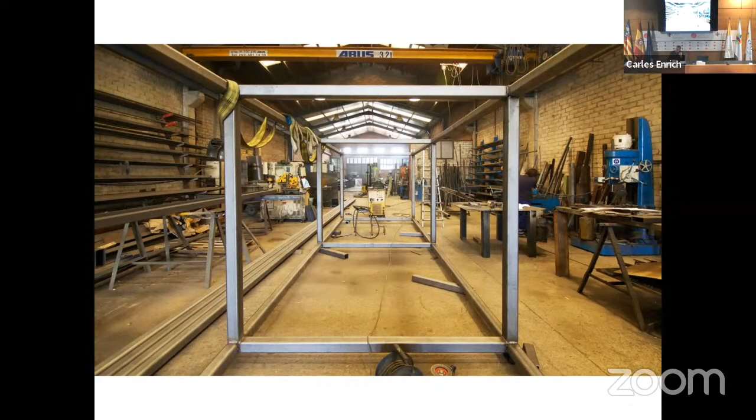We worked with local workers and three materials: metal, with these thin 8 centimeter profiles for the easy lattice work, and glass. Also trees and rocks — the context was also part of our materials for that interpretation.

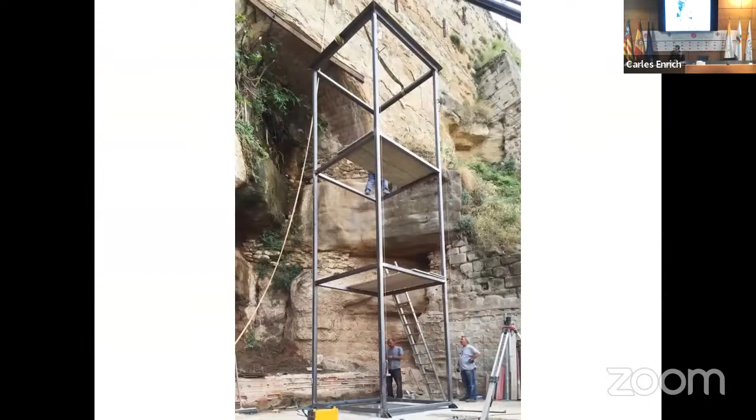With these very easy and repetitive details we built this elevator. It was done with a prefabricated metal structure, and then we built this lattice cover. People from Gironella were asking us, when are you going to finish it? And we said, no, it's already finished.

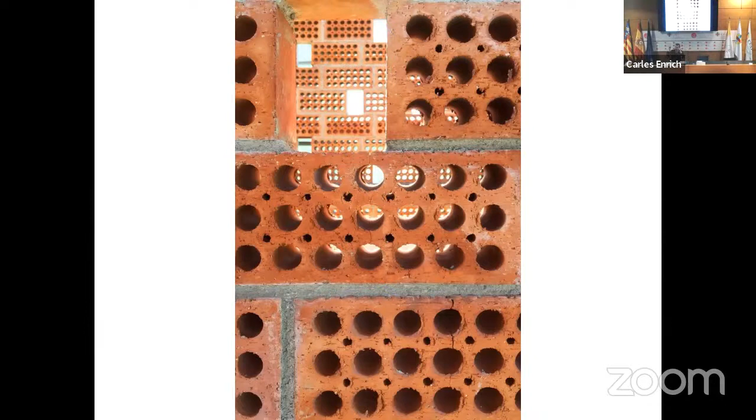They were really shocked at that moment, but we said it's already finished — and actually it's like this. It doesn't have any paint, anything, so it's really zero maintenance, and it has the sense of time. That was the key of this project — understanding the air, so instead of a 24-meter column we have a permeable surface, really, really light.

These are some images of the work when we finished it 8 years ago. I think this was one of our first works, and it really improved Gironella's life. It worked — it achieved our goal of being very light, very transparent from the plaza, but from the other side it was like a sequence, an insertion that understood the sequence of layers, a sequence of time.

We didn't want to put a glass facade in order not to have reflections or this kind of high-tech image. We wanted to understand this ceramic material of the place, and it started to become a landmark — a new public space that connected both situations.

After some years, this project won some awards, was in Venice Biennale, etc. So for this town, they were really proud of this project. And it really achieved...

The first commitment of this, but it really improved much more than they expected. So when we finished this, we had two more commissions in Gironella. The two commissions are quite interesting because they are in both parts of the section—one in the old part and then another in the river part.

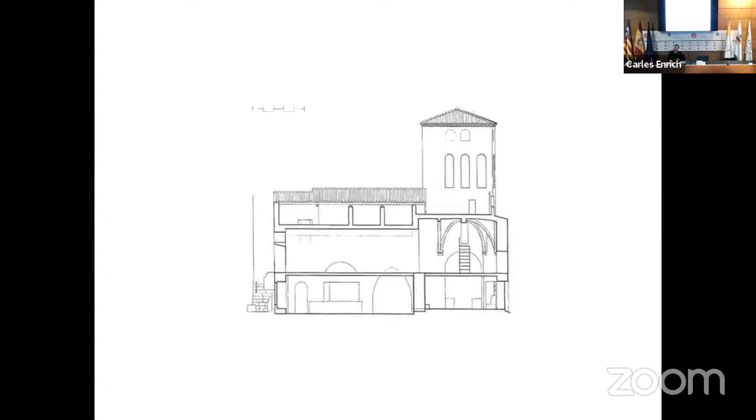This church was really close to the elevator—a former church in Gironella. It had passed through a really tough history from the 70s and 80s, where it was transformed into a house, a bar, an industry, etc. In the 80s they demolished the interior in order to recover the whole space, but it was closed as a storage space. It was not a public space—it was a storage space for the city hall.

They put a really postmodern facade, this kind of curtain wall—very not transparent, but reflective, with glass. I don't know the name of it, but it was a non-transparent facade, something really, really strong.

We had the commission to recover this space and transform it into a cultural place. They didn't know what the use would be, but we wanted to improve it, put in some facilities and services, and transform it into a public space, maybe for an art center or something like that.

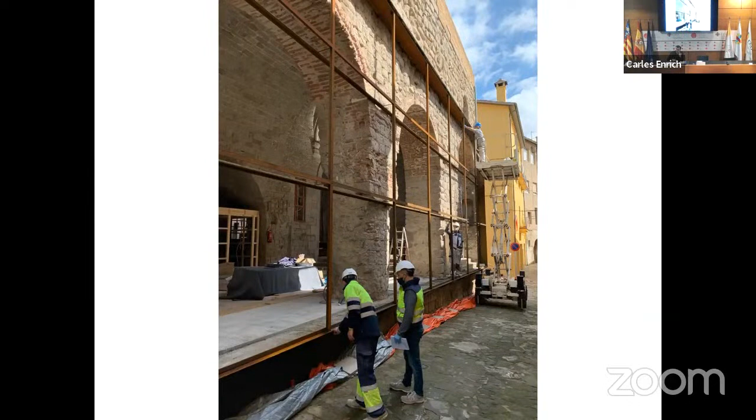So we decided to work with everything that we found, even with this facade. But of course we took out this material. We implemented the structure, adding more in order to have better isolation, and another rhythm more related to the old streets and old buildings of the place. And we introduced this wooden box in one of the chapels, which allowed for bathrooms.

So, within the interventions of energy improvement, a new facade which was better in terms of energy, and also an intervention in the entrance and in this bathroom—with these three interventions we transformed the space.

The space is interesting because, with this idea of permeability and transparency, it actually amplifies the space itself and connects it with the street. It allows you to see the interior from the street, and you can see the heritage. It breaks this idea of interior/exterior, and from the interior you can also have the facade of the street as if it were your own facade.

The same idea that we do on the elevator—we understand that the exterior is part of the interior, and we play with this kind of ambiguous situation.

Well, really fast, I'll pass some images of this space. It's really used for different purposes—for dancing, for concerts, even for lectures, etc. It's like a polyvalent space.

We had this really cheap double facade, a transparent facade, and then with just a curtain we improved the acoustic conditions, and we can also transform it into a non-transparent space. So just by placing this very soft layer—we finalized this project two years ago, and now they are really using it for different purposes.

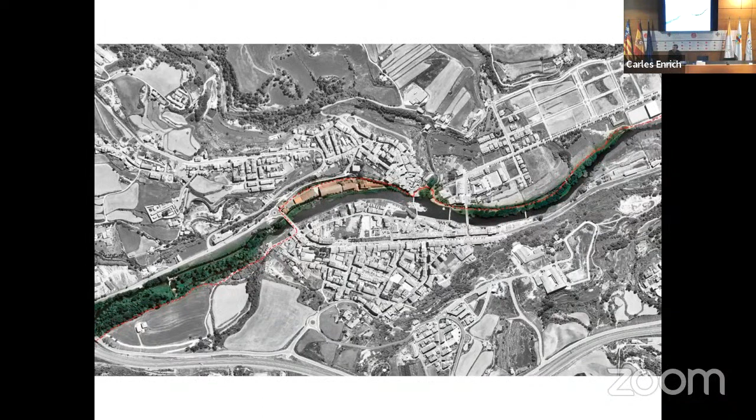The other project, which we were really happy to get the commission for, was about recovering this place, which the Municipality of Gironella decided to do something with, since it was the common path to get into the elevator.

And we placed green areas on the two borders. Of course, we had to put a concrete pavement in the center in order to connect the street with the industries and allow emergency vehicles access, as required by regulation for the firemen.

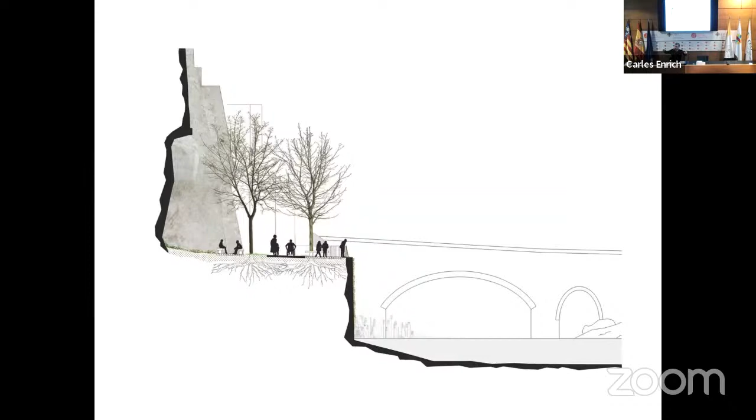Okay, but the idea is to minimize the interior, this hard pavement, and to have more permeable areas, and to improve the connection with the river.

It was interesting when we replaced the original fence and put in a very, very light handrail, that really transformed the place. We get more light, more connection with water, an opportunity to understand the material, the site, to improve the history, the connection of time and place. And now it's a place that people have engaged with.

People improved the connection with the river, and the best image of this lecture, I think, explains and sums up this idea: with very small, precise interventions, working with time and the different phases, we can really transform the city and improve this idea of life.

This is a festival that takes place in summer. It explains that the people of Gironella have understood the potential of this place and have really embraced it as a new public space.

Finally, we really think our work has to do with this idea of a sequence of time, understanding the past, and also understanding that our interventions are able to change the future, to improve a better future. So, thank you.